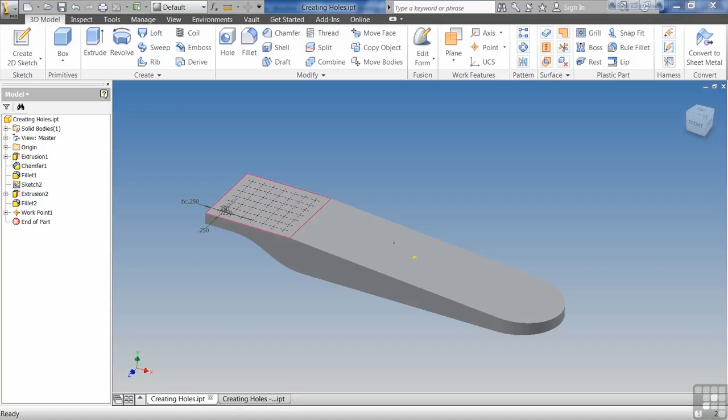In this exercise, we're going to discuss creating holes. The Hole command in Inventor is very easy to use and it's a very powerful tool. So let's get started. I'm going to go up and click the Hole command.

First off, you'll notice that I do have the little mini toolbar, but there is no roll-up here other than whenever you click on a couple of the different options. There are so many different options, there's just no way to create a mini toolbar. With any Inventor command, or really any Autodesk command, you work top to bottom, left to right. It's like reading a book.

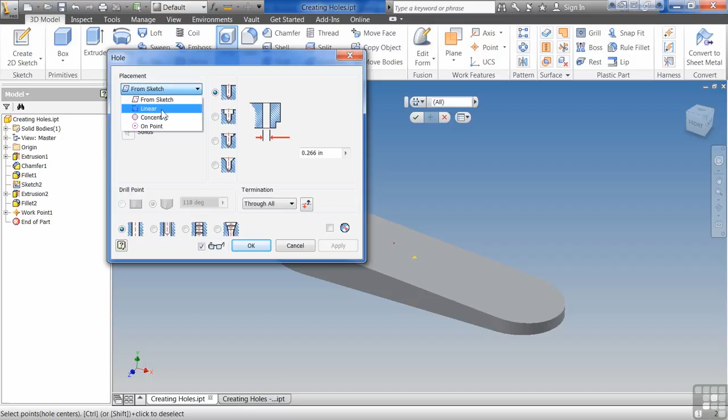So the first option that we have is which kind of hole we want to create. We can go from a sketch, linear, concentric, or on a point. Linear is what you're going to use 90% of the time. I'll show you that real quick. If I come onto this face and I select it, it tells me once I select the face to select reference line 1. And what that means is I just select an edge and I can type in a number.

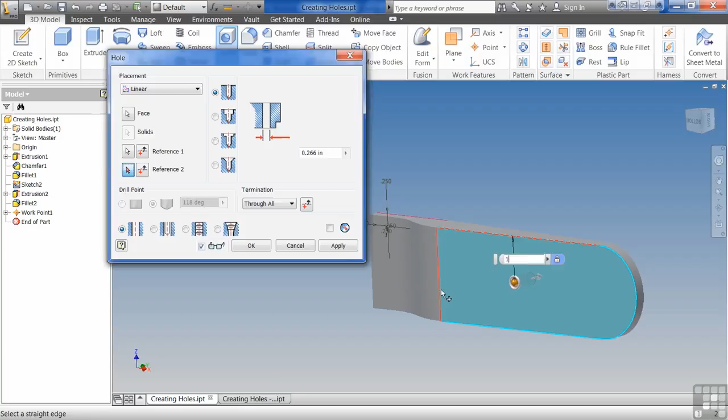It's asking me for the second line. If I look down here in the bottom left hand corner, you notice that the arrow is still red. So I type that in, give it a distance. So now I have located this hole. Like a lot of the features in Inventor, it is heads-up design, meaning that I can come over here and grab it and tweak it. But most of the time when you're creating a hole, you're going to know kind of what that dimension needs to be.

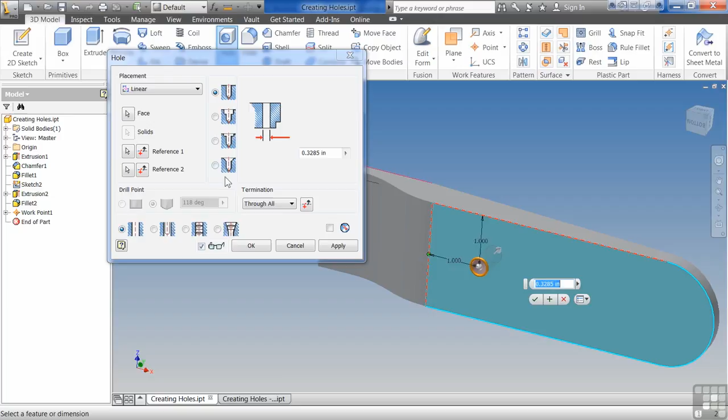The next option is what kind of hole is it going to be? Is it just going to be a straight through hole? Is it going to be a counterbore hole? Is it going to be a spot face hole? Or is it going to be a countersink hole?

For those of you not familiar with spot face, this is basically if you have an irregular surface and you need to create a flat spot before you start to drill or tap into a part. You'll see this a lot of times on cast parts that are rounded or slightly rounded, just because the drill bit will want to walk if the face isn't good and flat. And so what they'll do is they'll go in with a larger bit and just kind of waller out a spot to give it a flat spot, and so it's a spot face, and then they'll drill in the center of that. For the use of this exercise, we'll do a counterbore, just so we can take a look at it.

Our options right away tell us what kind of hole information we're going to give it. We can say, okay, I'm going to do a 0.25 inch hole. Then it asks what size counterbore is that going to be? Say 1/2 inch. And then how deep do we want it to be? 1/4 inch is fine there.

Next option you'll notice is grayed out if I come down here. And the reason is because this is set to through all. If I change this to distance, you can actually edit the drill point. The drill point is what it's going to look like in the bottom of the hole if the hole doesn't go all the way through the part.

About the only time I've ever messed with the drill point option is I had an air reducer that actually had a sloped bottom in the bottom of the hole, and then it had a tiny little hole, and that was like an air valve or an air gauge or something like that, so that it was kind of a choke point, reducing point. And so I messed with the drill point then, but most of the time you just leave that at 118. That's kind of the standard drill bit point.

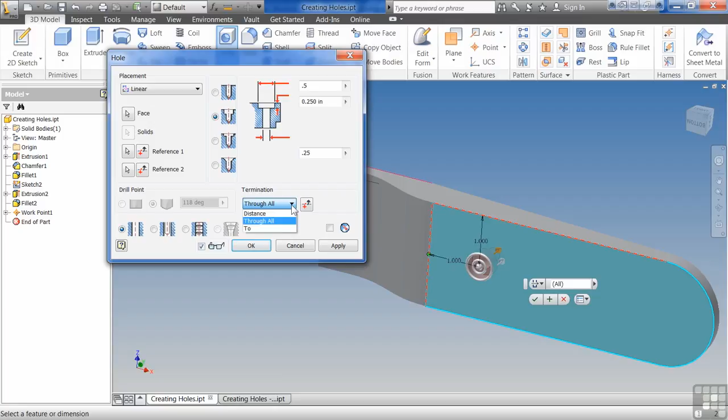Next option is termination. Through all basically says the hole's going to go all the way through the part. To, you can actually say, okay, I want it to stop on this face. And then distance. If I come in here, you'll notice the distance actually is a new measurement up here.

I could say 0.5. And you can see the drill point inside my part there, not going all the way through. Pretty straightforward. Down at the bottom, what kind of hole do we want it to be? Right now it's just a simple hole, meaning that we tell it what diameter we want it to be.

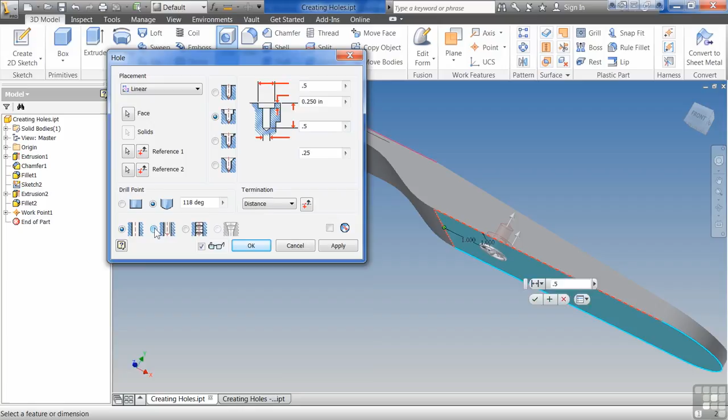The next option over is a clearance hole. And what this does is this lets us come in here and say, okay, this is going to be a socket head cap screw, 1/4 inch. And you'll notice that my measurements up here changed. This gives it enough clearance, basically, to fit a 1/4 inch socket head cap screw in here. Notice the hole diameter is no longer 0.25, it's 0.266. This allows for the threads to actually go through here.

Down here at the bottom, we can either do close, normal, or loose. Close is like a hole where, if you're ever working on something, you've literally had to kind of thread, even though it's not a threaded hole, you still gotta kind of turn the bolt to get it to go through the hole because it's so tight. So if you change it to close there, you can see it goes down to .257. So you only got .007 clearance in there.

And then loose lets it go the other way. A lot of times I'll do loose if I do powder coat or paint, because you're going to have a couple thousandths of paint or powder coat in there. So you do the loose hole, and that'll allow you a little bit of gap for that hole to get filled in there. Once we get everything set, we hit OK.

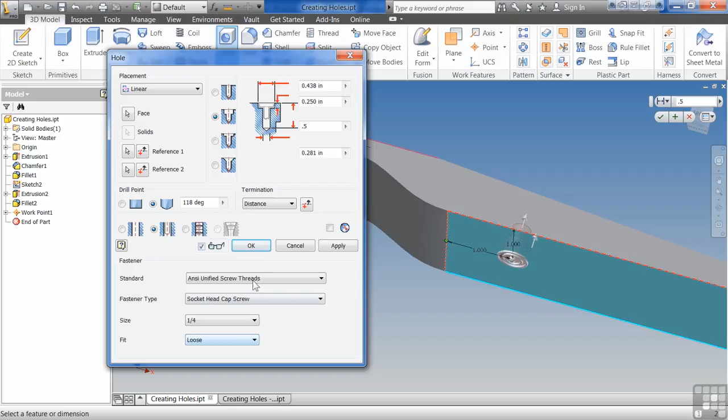And then we'll come up here and look at the next hole. So I'm going to start the hole command again. You'll notice that it automatically jumped to from sketch because I had an active sketch here and it wants to try to find that active sketch for me. Now these holes are pretty close together, so I can't use that. And I want to make these threaded holes for whatever reason. These holes are pretty close together, so I need to come down to number 8.

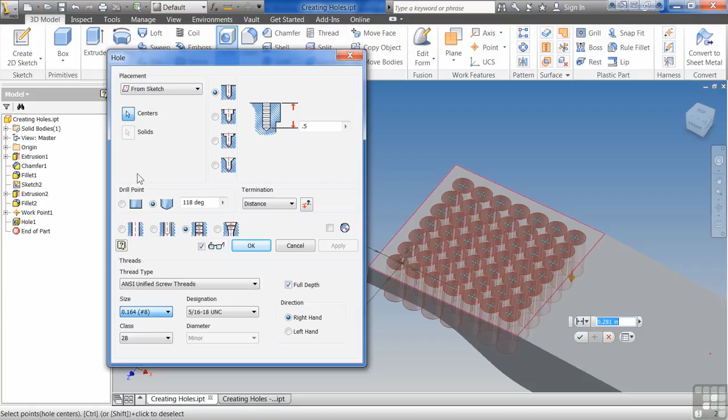And so now it says it's going to create a bunch of threaded holes for me in this part that are for a number 8 ANSI screw. It tells me the thread designation, what class it is, is it going to be full depth, or right or left-handed threads?

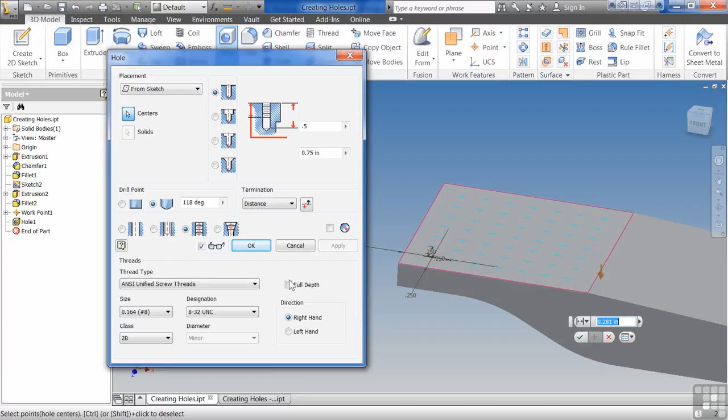In a situation like this, you can uncheck full depth and say, okay, I'm going to actually pre-drill this and I'm only going to thread down so far for whatever reason. Most of the time I do full depth. Very rarely have I ever had to thread down. In reality, usually you don't tap all the way to the bottom of the hole, but it's so close to the bottom it doesn't matter. So we can hit OK here, and you'll notice that it put the threads in there for me.

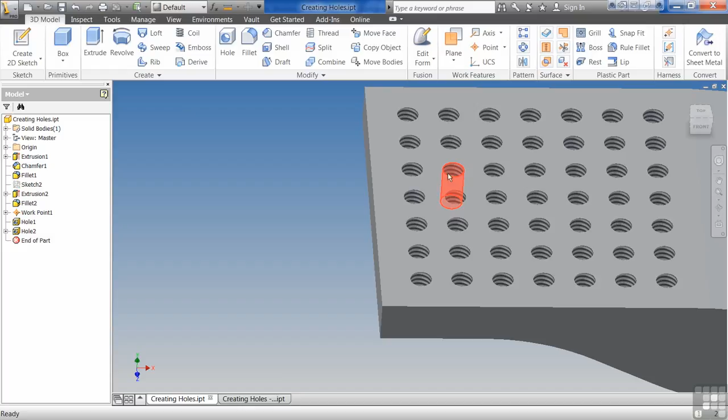Now the threads are not threads. They are just bitmap references. Even then, that's kind of excessive. If you've got a great big giant 10,000 part machine, it's really not necessary to put the threads in there. You can just put the holes in there, whatever size you want them to be. The threads are not real threads. I can't zoom in and see the pitches of the thread. And the reason is because the mathematical overhead of calculating a helix going through that hole is huge.

Just this number of holes here, if these were actually cut into the part, would use as much memory as a 4,000 or 5,000 part assembly. So you definitely do not want to add threads whenever possible. You don't even want to add the bitmaps, but there really is no reason to ever cut the threads, unless you're designing a screw or some kind of screw shaft or something like that, where you're actually going to be cutting the threads on a CNC and you need to give the CNC information more than just the thread and pitch.

This will actually tell it, okay, this is this size thread and pitch when you put it on a drawing. If you're going to pass this over to a CNC machine and they're actually going to go in there and cut these threads and it's got to realize the 3D geometry, then you can draw them in there. But most of the time you're going to buy this stuff. You're not going to be creating threads. Unless you're making screws, there's no reason to ever cut threads. Stay away from that whenever possible.

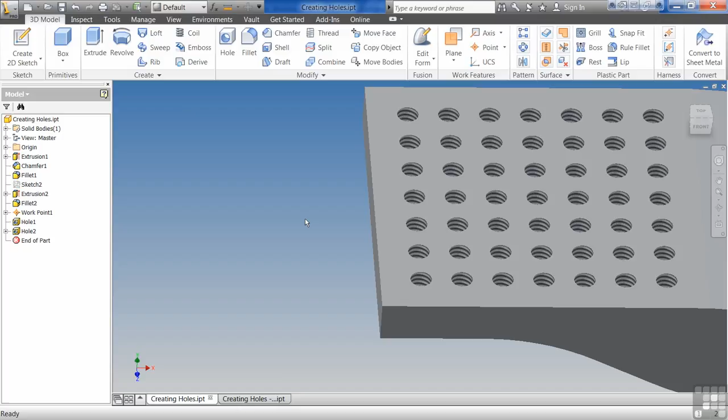But you can see it looks nice. Gives me my nice little threads there. You'll notice that some of the holes don't go all the way through, so those actually get the drill point at the bottom.

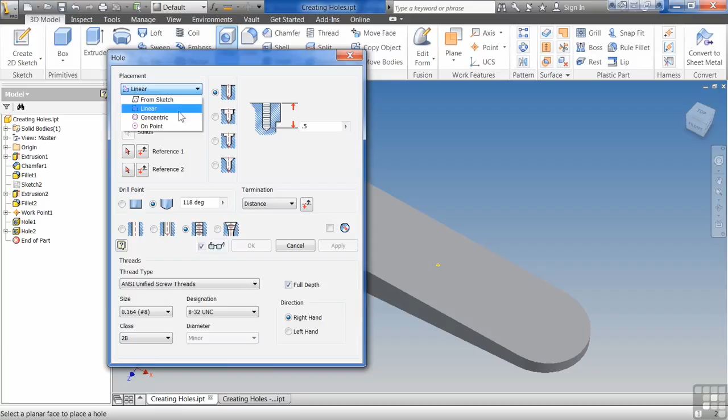So now I have my block of threaded holes there. The next option we'll look at with the hole command is concentric. I'll click on this plane, and then it asks for a concentric reference. So I can say the edge there, and basically what it does is it puts it on the center point of this arc.

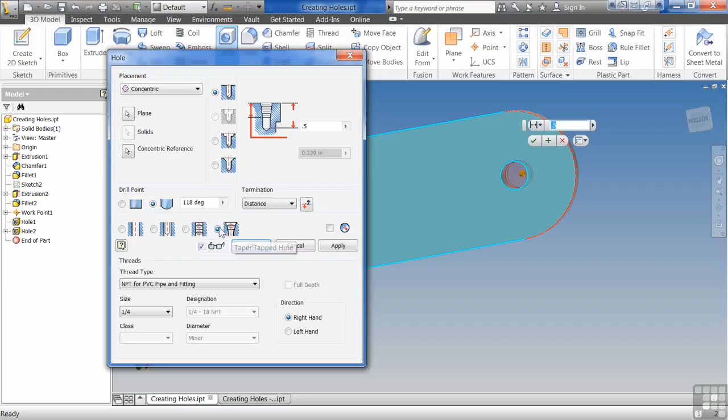In this situation, let's say I'm going to have this tool have the ability to screw in a pipe to hold it. This is going to be some kind of mounting bracket for something. So then what I can do is I can use the taper tapped hole option. And you can see that this is basically pipe threads. So I could say, let's do 1.5 inches. Still too big. 1 inch. Take it down small enough to where we can actually see it in our part here.

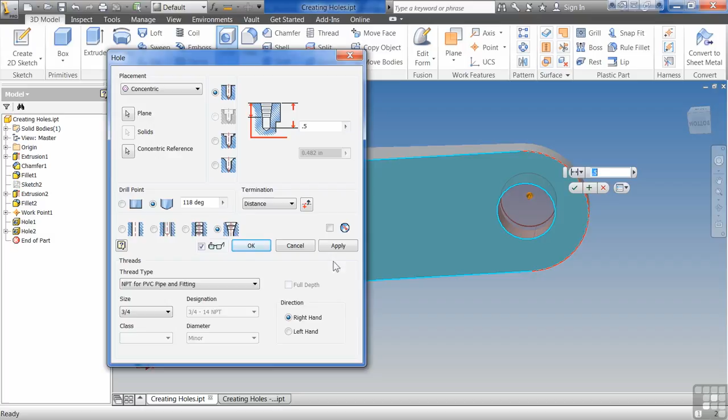So we go 3/4. So what this is going to do is actually taper out the way a pipe thread works. So I hit OK. You can't really see it. If I look at top here, the way pipe threading works is it's actually got a slight draft on it so that the pipe can get started. And so that's actually a pipe thread hole. So we can add that in there.

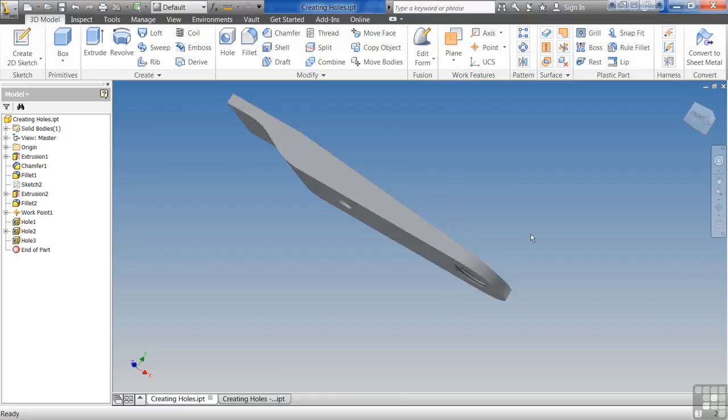And then lastly, the last hole we can take a look at real quick is on a point. Say this is our point. Then it asks for the direction. I can click on this face, and so now this hole, I'll just do a simple clearance hole here, and I'll say through all. So this hole is going to be perpendicular to this face, basically. I could have just clicked on the face for this one.

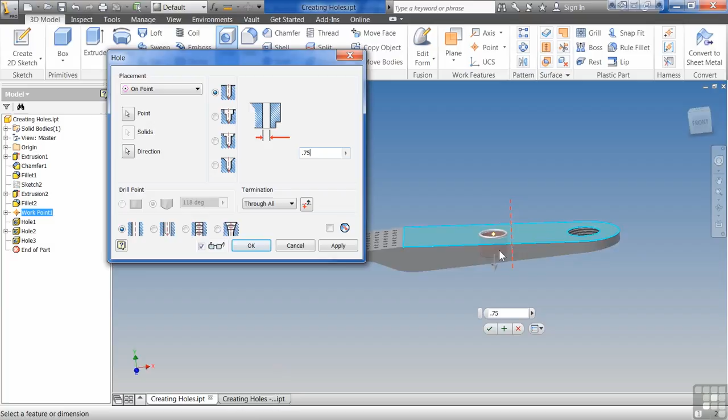Where this comes in really handy is if you had a round object. If you were going to put a hole in the side of a round object, you could go in there and click on the side of the round and have an axis through the side of that part, and the hole would follow that axis. So if you didn't have a perpendicular face basically to start from.

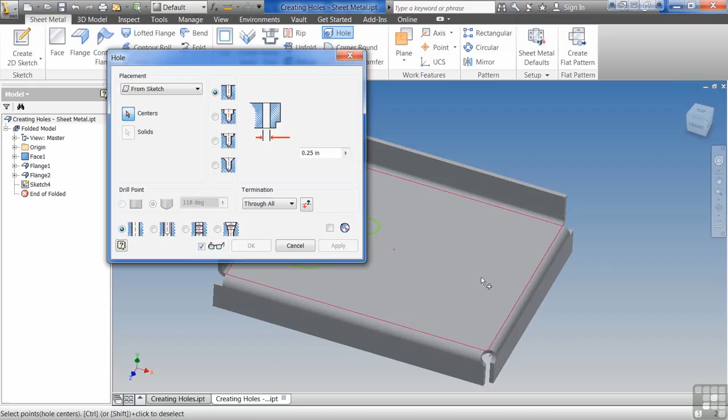One last thing I was going to show you is holes in sheet metal parts. They work exactly the same, and I highly encourage you to use the actual hole command when you're creating holes in a sheet metal part. But if you have irregular shaped holes in a sheet metal part, then you can use a cut command. And it looks very similar to the hole command. The only thing is you don't get any hole information.

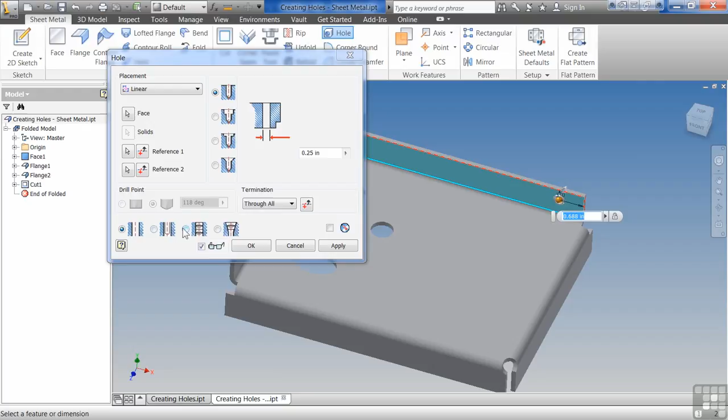For example, if I put a hole in here, and I put this information in here, and it's actually a threaded hole, whenever I go to dimension this on the drawing, I can click on the hole and it'll say this is a hole with this size threads. Whereas a cut in a sheet metal isn't going to understand that it's a hole. It's going to understand that it's an opening. It's a subtle difference, but the reason I mention that is because I encourage you to use the actual hole command whenever possible.

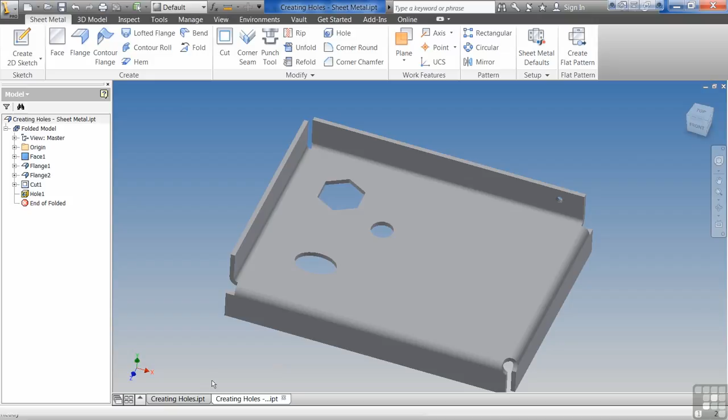If it's round, it needs to be a hole. Don't use the extrude command. Same with the standard parts. We could actually just extrude out a hole, but then whenever you go to dimension that and put it into an actual drawing, it's not going to understand that it's a smart hole. You've heard of smart holes before, you probably work with them, but these actually have that information with them, and that information will tell it what size thread it is, what size hole it is.

So try this, play along with this part a little bit and see what fun you can have. It'll be under creatingholes.ipt and then creatingholes-sheetmetal.ipt. So you can take a look at this and see what you can do.